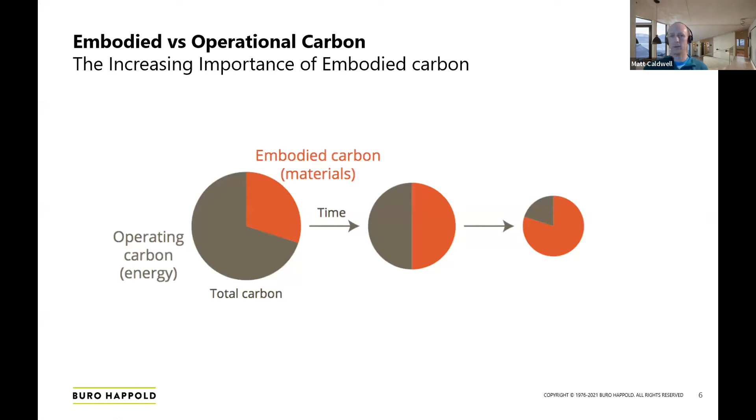And obviously right now is the time when we need to be reducing our emissions. Over the life of the building, the operational carbon may go down - hopefully it will - as the grid decarbonizes, and potentially pieces of plant or equipment within the building might be more efficient. So over time, the proportion of the carbon footprint that's embodied carbon will get larger and larger. So it just emphasizes the importance of us considering that now - it's important today, and it will continue to be even more important over the life of the building.

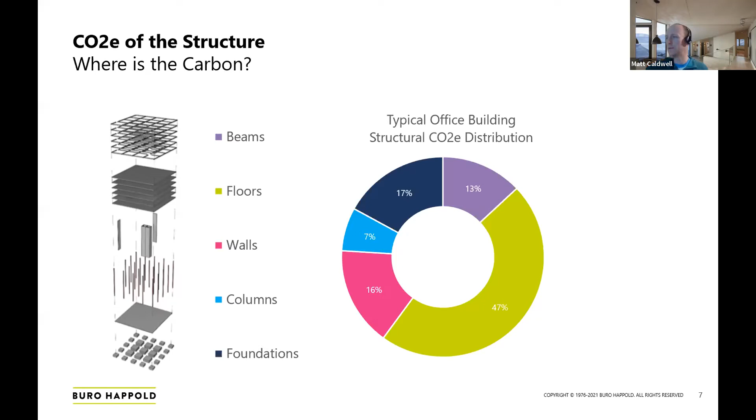If you're looking at columns, swapping materials or spending a lot of work on them often is not as beneficial as focusing your attention on the floors.

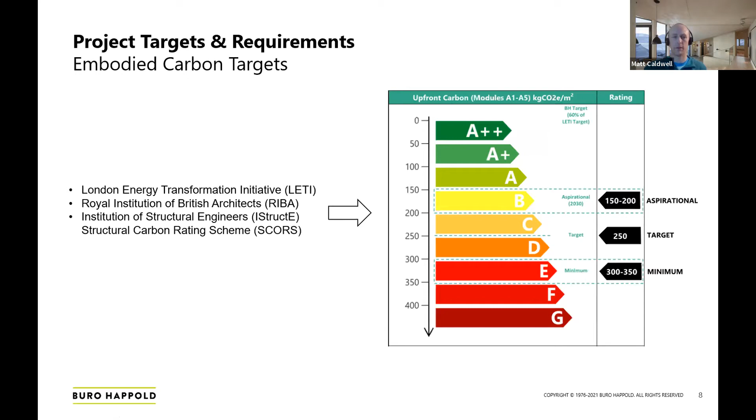At the start of the project, you could be deciding materials overall. You could be looking at whether you're building 10 stories or 5 stories, whether it's a tall building or a wide building, whether it's framed or load-bearing walls, and also controlling the grid. As the project develops and the design develops, you'll have less and less ability to influence it. So making the big decisions in an informed way early on is extremely important.

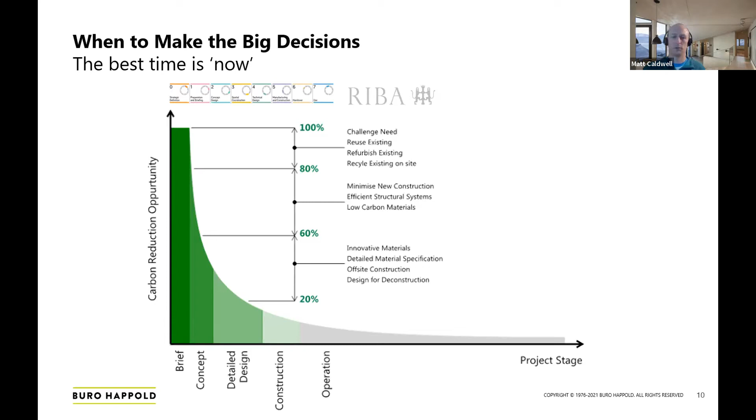Obviously, it needs to be balanced with what the spaces need to do within the building and the architecture of the building. Once you get down to really short spans, you're seeing less benefit in embodied carbon terms, but you also need the building to function over its lifetime.

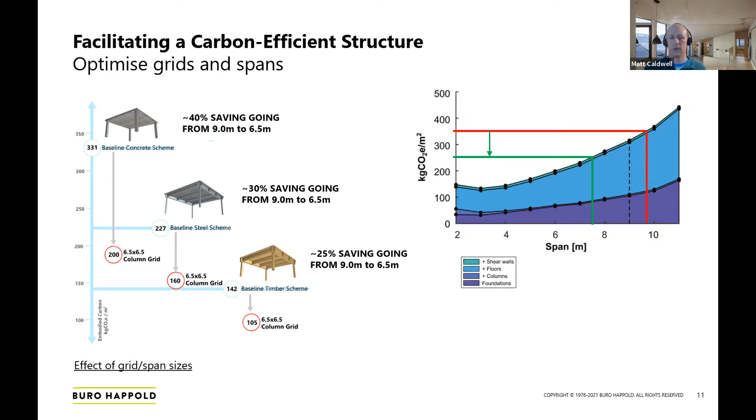And dare I say it, a wholly timber structure is not always the best answer. You need to use timber in an appropriate way, rather than shoehorning it into a design which doesn't suit it. There may be elements within a structure where you have lower embodied carbon and a more efficient structure by introducing another material. The other way of looking at it is if timber is coming out as a very inefficient way of forming a particular element, then maybe you need to go back and look at the way the structure is framed, where the loads are going, and revisit it that way around.

But it's not always most efficient to have timber everywhere. Don't force it to do things that it doesn't do efficiently.

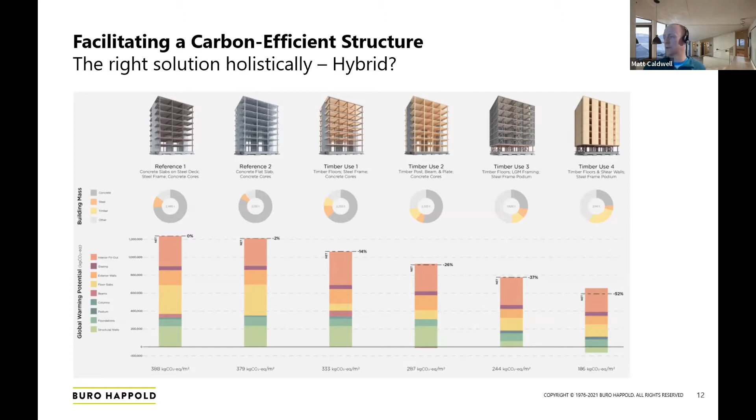Particularly with timber, one of the huge advantages is the carbon it stores while it's been taken out of the forest but not yet burnt or disposed of. The benefits really only come about if it's a long-lived product or series of products. What you don't want is something used for 20 years and then burnt, or even worse, taken to landfill.

So considering the way your elements are designed individually, and particularly how they're joined together within your building, will decide whether you can take the whole building down and rebuild it elsewhere, whether you can adapt your building in situ, or whether you can take the elements apart and put them into a new structure. Considering that is very important, particularly with timber.

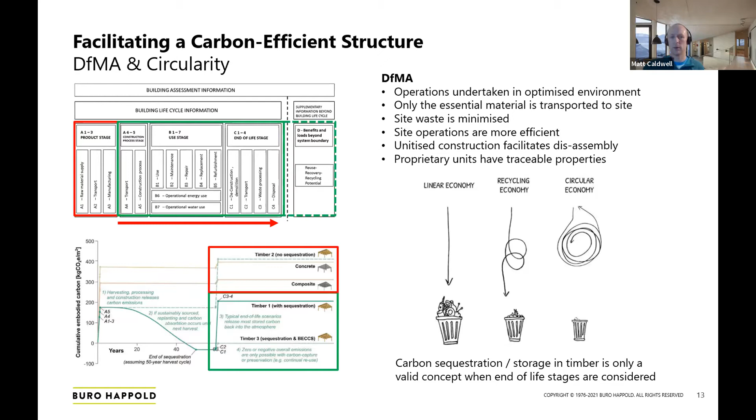This is a big debate, had on a regular basis. The word sequestration is used a lot - I prefer to use the word storage. It's not worth trying to understand this whole diagram below here; it's probably just worth saying that it is complicated. There's a lot of carbon going in and out of a project.

You will see projects in the architectural press which claim to be either carbon neutral or even carbon negative. When you read that, you just need to look into it carefully and understand precisely what the claim is.

Depending on how you run your numbers, if you use all the sequestration figures for timber, your analysis could indicate that putting more timber in is better than less, and the more you put in, the better it performs in terms of being a negative value - which obviously doesn't make sense. You don't want to make a beam twice as big as it needs to be.

Those numbers are not really telling the story. So I like to quote the stored carbon within a building rather than calling it sequestered.

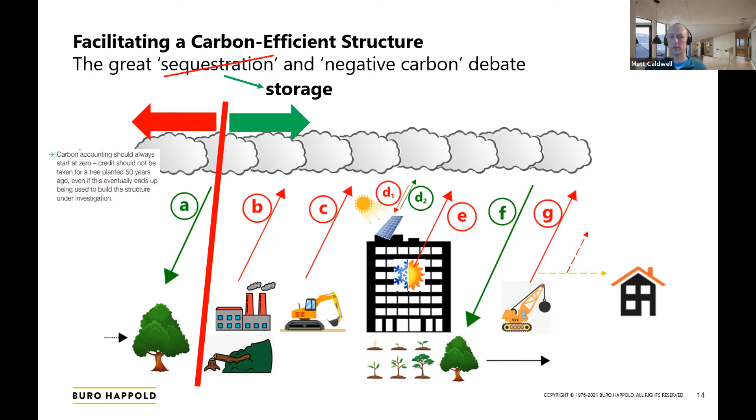We talked a lot about the superstructure, which is normally where you focus a lot of attention, probably because it's the bit you see and the bit most readily changed between materials. But it's worth keeping in mind the substructure.

The default material for substructures is obviously concrete, and there are good reasons for that - its durability - but it's worth considering other options.

Particularly in the Netherlands, they use a lot of driven timber piles, and there are certain considerations you need around durability primarily. It will depend on your soils whether that's relevant, and also where the water table is - otherwise you might end up having to have a reinforced concrete cap on the timber to go down to the water table anyway, and it might not be practical.

Helical screw piles are a good option, particularly for lighter buildings - so a scheme of 1 to 1.5 stories. This could be a very possible solution, though it does depend on the soil to some extent.

The advantage of these is that far less material is used than in a concrete pile, and it's removable, facilitating circularity again - in principle, at the end of the building's life you can take them out and reuse them. Often you can also get the option where the central pipe forming the pile can be reusing excess stock from the oil industry, which is quite a nice poetic side of it.

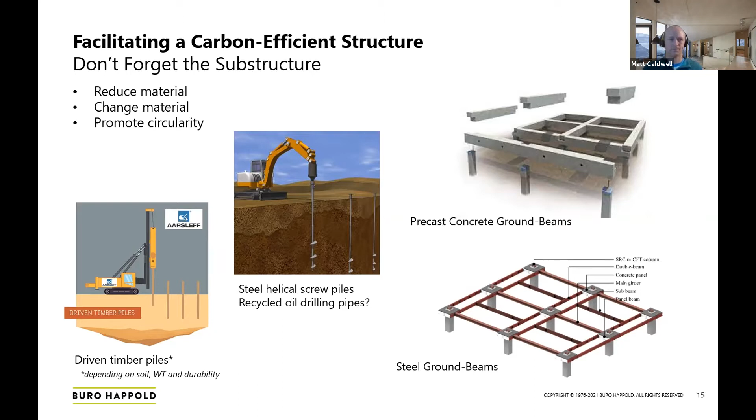And do the math - have a look at what you're using within the building, especially if you're optioneering, even if it's quite rough. You don't need it down to the very last kilogram. Even just making rough estimates early on, it's much better to have a rough analysis to help inform your decisions rather than waiting till the end to get a perfect one.

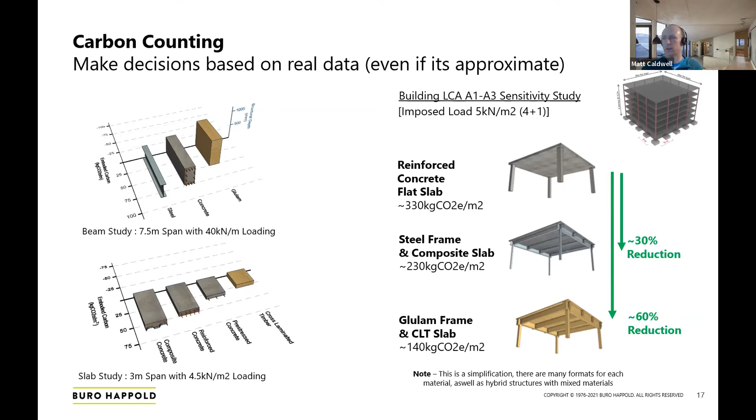And sometimes your gut instinct isn't quite right. This is just an example of a concrete structure, which I ran quickly, so maybe don't quote it directly, but you would possibly instinctively think the hollow core plank is going to be low embodied carbon because it's pre-stressed and it's got fresh air inside it, so it's not just a solid lump of concrete.

But actually, when you dig into it, you often find that precast concrete manufacturers don't want to use any cement replacement, so they want to cast it to cure as quickly as possible, get it out the door, off their production line and sold, which means that you're probably not getting any cement replacement in it. So the material itself is actually quite carbon dense.

Whereas you might think an in situ poured slab would be higher embodied carbon, and it certainly would be if you were using no cement replacement. But if you can, the advantage of in situ is that you can then introduce cement replacement. And if you went to very high levels of GGBS, like 70%, that could come out, even though there's more material, lower embodied carbon than the precast plank.

It's obviously not as good for DFMA and modern methods of construction, and it's not as good potentially for circularity. But I suppose the point is just to look into these things and consider the detail, because sometimes your gut reaction isn't the whole story.

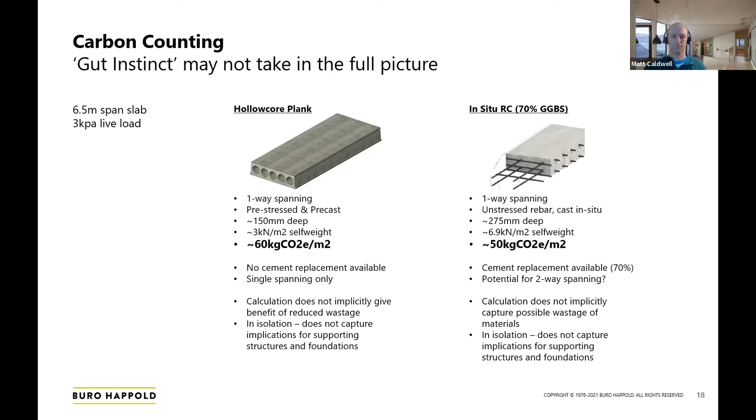And just to talk about timber specifically, you probably have presentations already on this, but the advantage of engineered timber that we have available to us now, which we didn't have 50 years ago - traditionally, if you needed to make a big beam or a big column, a large section of timber, you had to find a tree that was big enough to have that bit of timber effectively inside it. It would have been growing a long time, and you wouldn't get all that much material out of that tree.

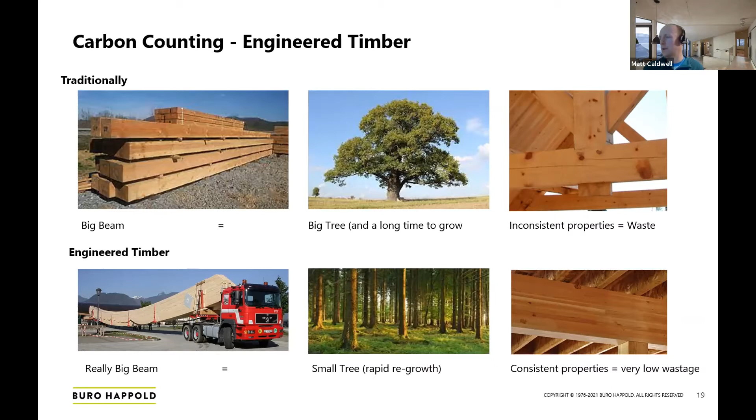You also then have got all the knots and faults which are in the timber, which means that you've got to design according to that and cater for the fact that there could be a big fault right where you don't want it. Whereas nowadays we can make really big beams, as you can see there, but they're actually made out of lots of small pieces of tree, which means that you can use more of the tree. You can use trees which are not as old, and by laminating it all together, we've also got a very consistent material, so you're not having to cater for the fact that there might be a knot all the way through the worst area of it.

Then digging into timber a little bit further, or engineered timber, there's obviously lots of different forms of engineered timber, which are better or worse for certain jobs, and so you can get an efficiency in your embodied carbon and your cost and amount of material in general, just by selecting the right product for the right location.

So you might look, if you were really trying to work some beams really hard, at LVL instead of glulam. You might find that cross-laminated timber was becoming a bit inefficient for a slab, so you might go to I-Joists with plywood on top of it, for example. So it's worth looking, even once you've decided perhaps that you want a timber structure, at the different options of timber products within that.

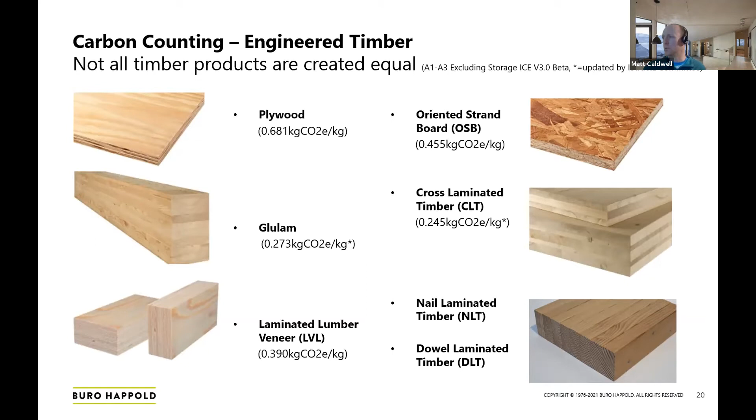So just applying this to a project, the business-as-usual, kind of dumb way of looking at it might be just to chuck in some reinforced concrete piles, because you kind of know that will do the job in most situations, and then cap that off with a big lump of concrete as a pile cap. And then you might put a frame in so that the structure is kind of separate to everything else in the building. By doing that, you'll end up with point loads, which might need piled foundations.

And then again, you might just pour your slabs in situ concrete, because that's kind of a bit of a default. You might just have your spaces on different stories of the building not stacked at all, so you're having to transfer out the weight of partitions above.

Your partitions, again, you might just go for concrete block, because that's kind of cheap and basic. Brick facades are quite often used just to get through planning in lots of cases, and a roof void up there, which isn't doing anything for you.

But looking at it in a smarter way, if it's a small building, you might look at distributing your loads to the foundation so shallow strips or a raft work for you, reducing the amount of concrete. If you use load-bearing walls, you could effectively form the architectural skin of the building and use that as structure at the same time, rather than doubling up with a frame. That will also help distribute your loads. Stacking spaces so that you can have load-bearing walls.

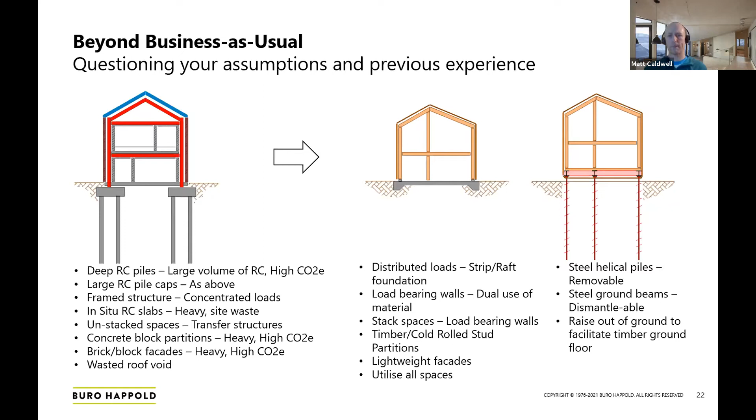Excellent, thanks very much. That was really insightful. I think what you've captured there is really how modern structural engineering has to think - it's about how we structurally engineer for the future, and think about the materials we're using and the optimization of those materials relative to the end use.

What was interesting as well is the point about wanting timber-based solutions, but we have to think also about the timber products we're utilizing within that end system, because they have different associated carbon credentials, etc. So there's that piece, and then also from the foundations - not just the weight of the structure, but how you set the structure out and the impact that has on the foundations, and the type of foundation you can therefore specify, and there's a range of those.

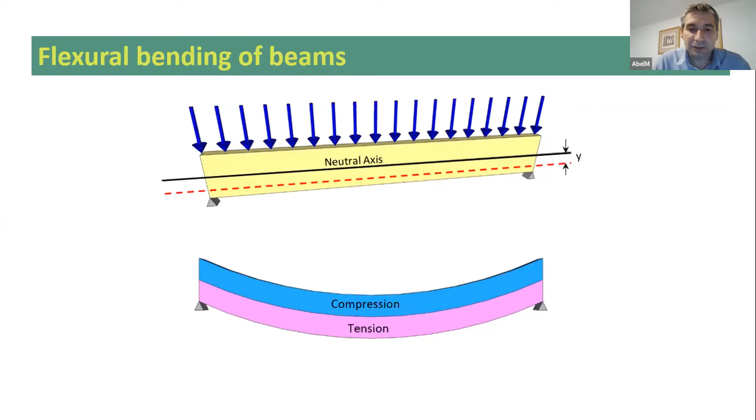The magnitude of both bending moment and shear forces will vary along the beam. However, this variation is due to the nature of the forces, such as a point load or a uniformly distributed load, or the fact that it is simply supported or a multi-span. For example, if you have a uniformly distributed load, you can find that your maximum shear forces will be near the support and your maximum bending moments will be at the mid-span. However, the cross-section of the beam at this stage will not influence the magnitude of these forces.

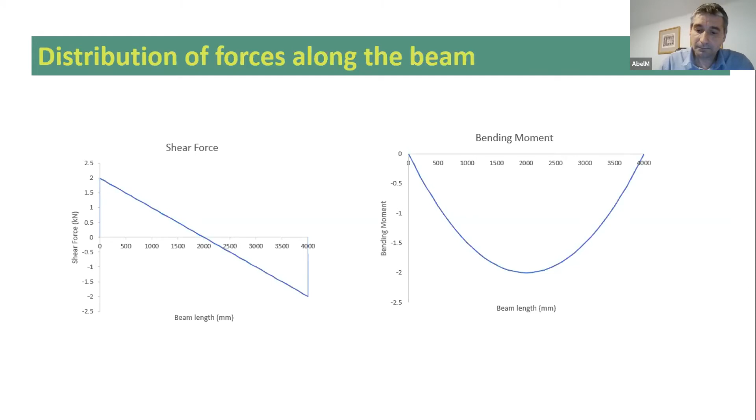Once we consider a section within a beam, these internal forces will become what we call stresses. Basically, a load over an area is a stress. And then we can talk about bending and shear stresses. The magnitude of this stress is important because we need to ensure that they are not over a certain value, or they are not over your strength values. Otherwise, you are risking failure in the beam. The distribution of such stresses within the cross-section can be determined using a formula that has been deeply ingrained in engineers' education.

These equations are interesting in that they tell us the distribution of stresses within a section is dependent on shape, which has an influence over the magnitude. For example, in bending stresses, you can see the I, which is the inertia, or the resistance of the beam to rotate. You can see the Y, which is the distance between the neutral axis and the fiber we're talking about.

For the shear stresses, you can see the Q, which is the first moment of inertia, or a measure of how the area is distributed around the neutral axis. And T will be your thickness, and again your inertia, and M and V are your moment and your shear.

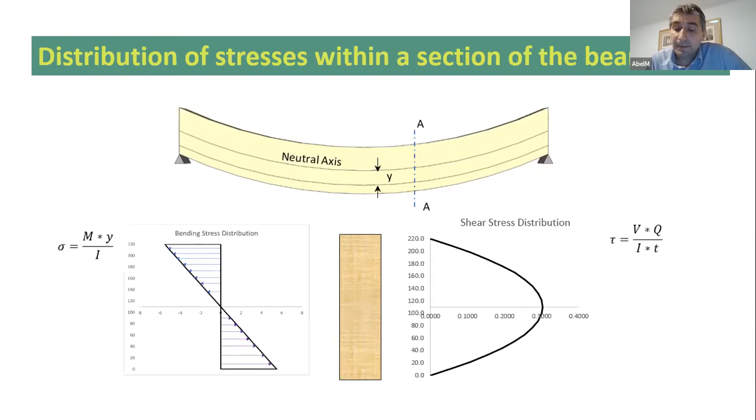So, as I said before, most I-Joist manufacturers will put a softwood flange at these locations. The main reason is because timber has very good bending strength. Some manufacturers have replaced that with laminated veneer lumber, LVL.

At the beginning, the web used to be plywood, which has been changed to OSB because OSB has a higher shear strength than plywood. Different manufacturers have different products; they usually have different depths and different widths for the flange, and they will play with these parameters to gain advantage on bending strength, shear strength, and stiffness as well.

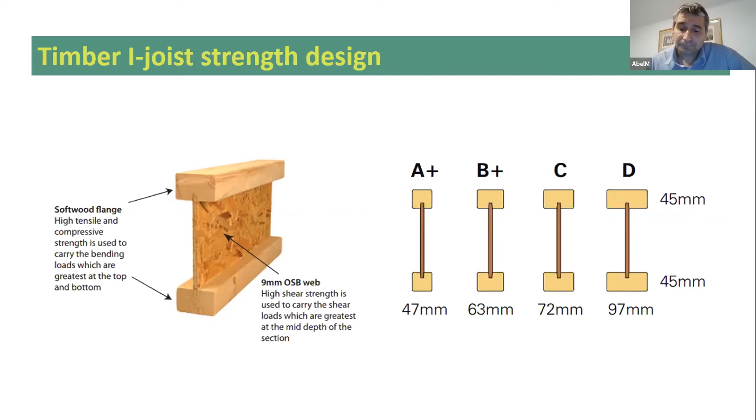One of the areas we talked about in timber design is that strength is an important property, but most design in the UK, especially for UK floors, is stiffness limited. If you look at the design codes, they normally reach deflection or vibrational limits well before the strength limit. So it's important to see how an I-Joist section can help achieve higher stiffness so you can achieve the spans needed in actual design.

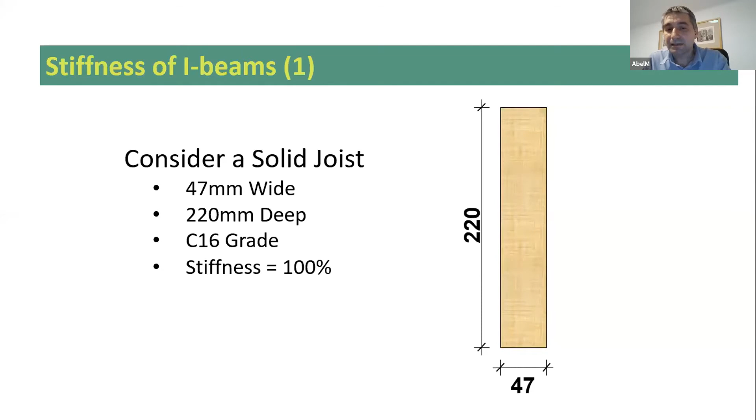Looking, for example, at a normal 220 by 47 old-style C16 that used to be used in timber floors, we will call that stiffness 100%. If we cut a portion from the middle, we have a 21% reduction in timber, but we only lose 2% of the stiffness.

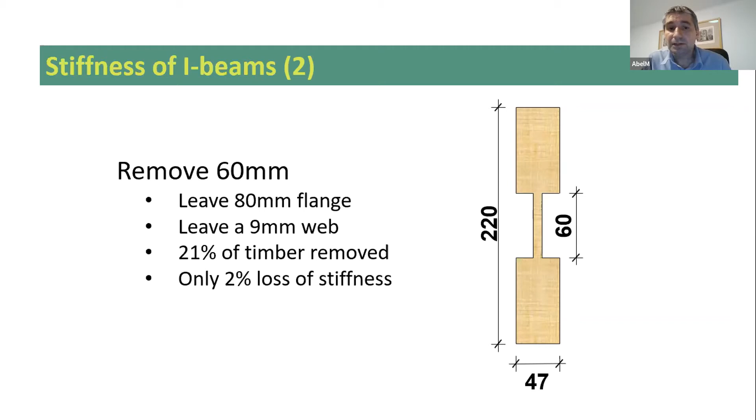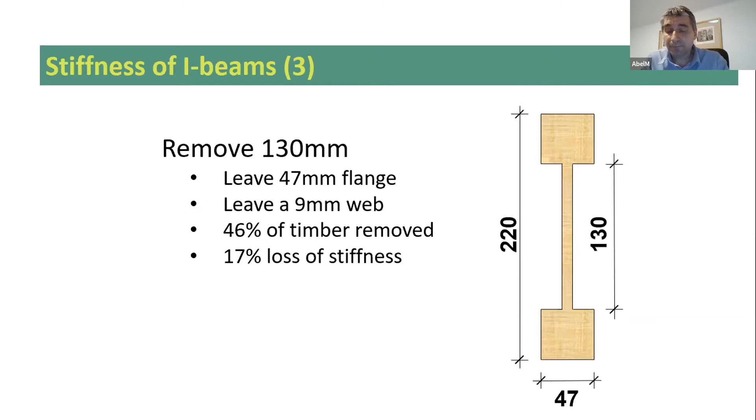Cut that further, 130 millimeters, and we get 46% removed and only a 17% loss of stiffness. So what happens if instead of C16 we use C24 for the flanges, and instead of timber for the web we use OSB? You find that you get an increase of 46% in stiffness over a standard C16 joist. And that's basically the philosophy of an I-Joist.

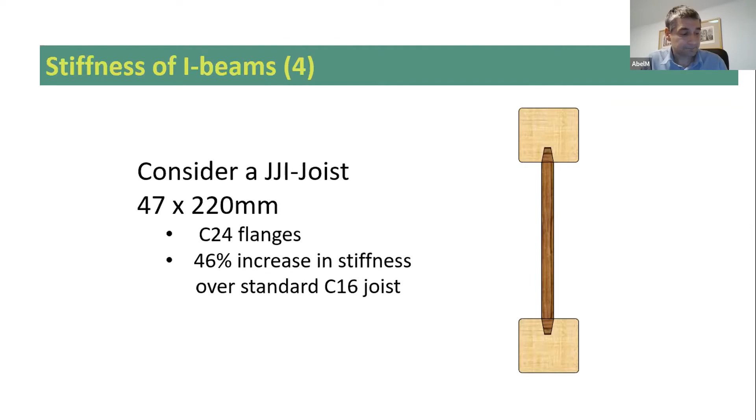So there are different advantages when we're talking about I-Joist. The first one is optimized amount of material. As you can see, you can save a lot of material compared to a rectangular section. And that is important in an economy when timber is scarce. We are celebrating, and I'm very glad to see a lot of different projects with timber, but don't forget that it takes about 20 to 25 years to grow a tree. So optimizing the resource as much as you can is paramount.

Another advantage that timber I-Joist has is that they're lighter. They weigh much less than other options. So it creates a lighter structure, and hopefully it will save you some money on foundations.

They are quick to install because people can handle them. Extremely stable because you've got small sections, and also timber panels are very, very stable to moisture. They don't expand and they don't grow as much as timber does. And also you've got availability of deeper sections, longer spans, higher stiffness to weight ratio.

And you can drill services. You only have to go through a 9mm OSB to drill a hole in order to pass an electrical cable or a pipe. And that's a very, very usual scenario when you're talking about traditional UK housing.

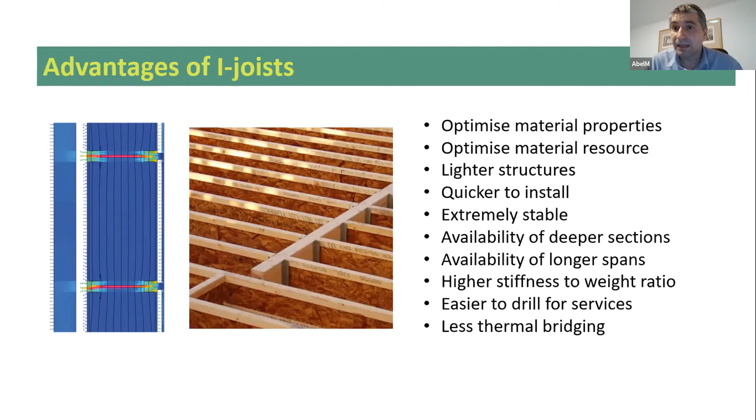Just to finish, I would like to show some of the projects we have been involved in. As I said, these projects are more diversified now, from typical floors to mezzanine floors in supermarkets, or roofs, or ground floors, or even walls, as you can see there.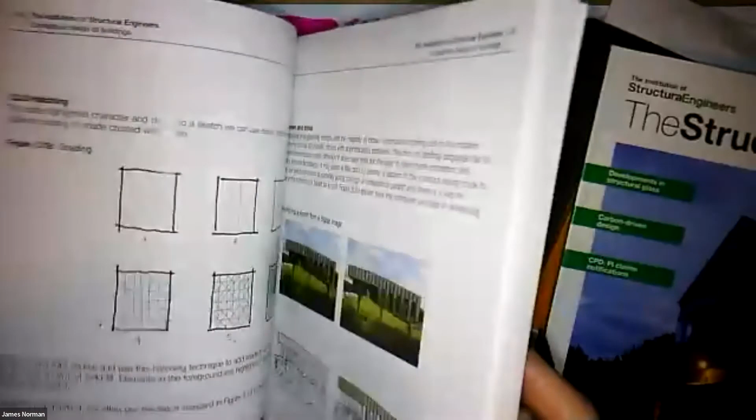Tabitha has the link - I actually recently wrote a book on the conceptual design of buildings. It's aimed at structural engineers. If you're a student doing a final year design project or an earlier year's design project, this book is, I think, hopefully gold. If you're an architect, there's still loads of stuff in here, and it's based not just on my experience but a whole load of us wrote it together, with a whole load of experience put in.

Anyway, so questions I think we should be asking - I've got a whole load of what if questions. What if cement is banned by 2030?

What if energy intensive materials are taxed so they cost 10 times more than they do now? What if your project was the last project to use this particular material? What if all metals had to be recycled? What if our timber usage is limited to guarantee the world's forests are growing?

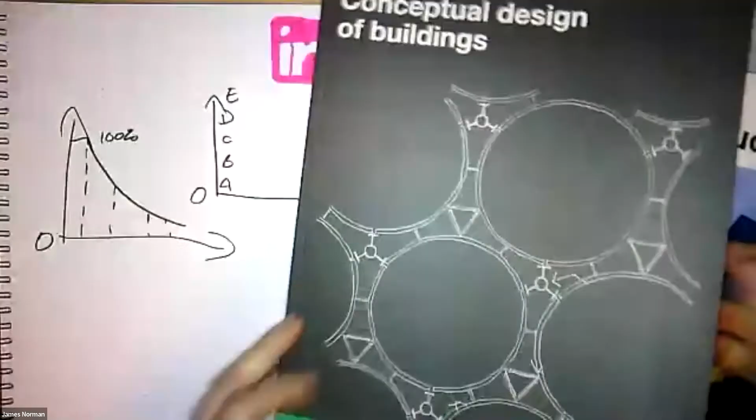Which I think is a really important question, and relates a bit to what Matt was saying earlier about it being all very well to talk about carbon sequestration, but you can't rely on what's going to happen in the future in what we're doing now. So I actually took a what if question, and I think those questions are really powerful. I took one recently and drafted a little article that the I-Struct asked me to write for them.

This is available for, well, I was going to say for free. It's free if you're a member of the I-Struct, which I'm not, even though I think they're fantastic, but I don't want to do the big scary exam. I'm sure some people on the call are. But if you're a student, I think you should be able to become a student member - and definitely if you're an engineer, regardless of what you're studying. They've got loads of fantastic resources, and if you're a student member, all the articles they've done around net zero you can get for free. So I'd really recommend you dig out not just this article, but look at all the different stuff.

I noticed in the chat earlier someone was asking about sustainable design and resources. They've got an absolutely incredible wealth of great resources on the I-Struct website at the moment.

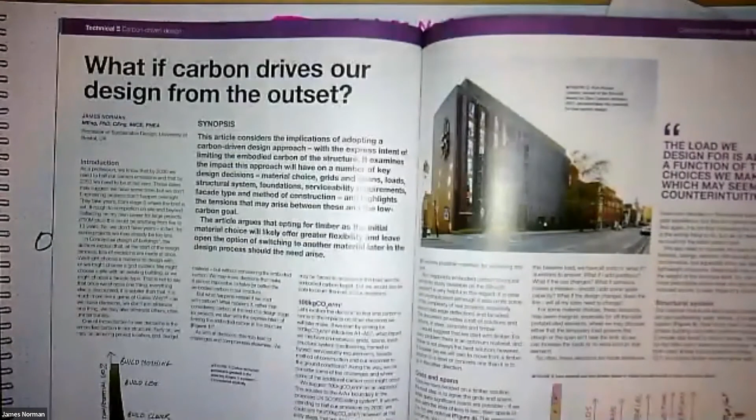So I started by asking, what if carbon drives our design from the outset? And I was trying to get to - this is a diagram that Matt drew, I stole the one from BuroHappold, I've got lots of friends there, but I redrew it by hand to make it look a bit more squiggly. And I said, what happens if we start and aim for down here?

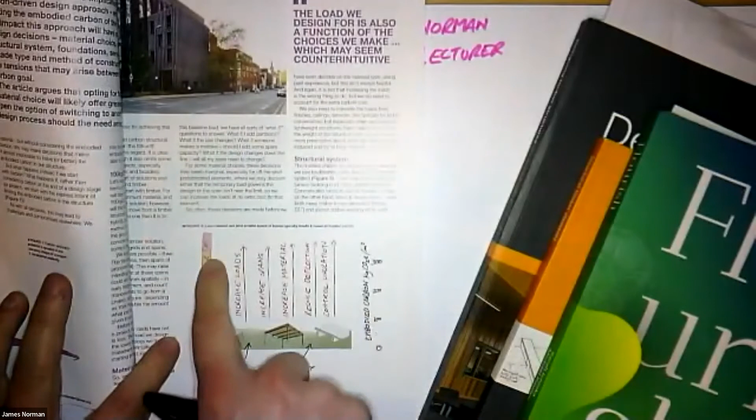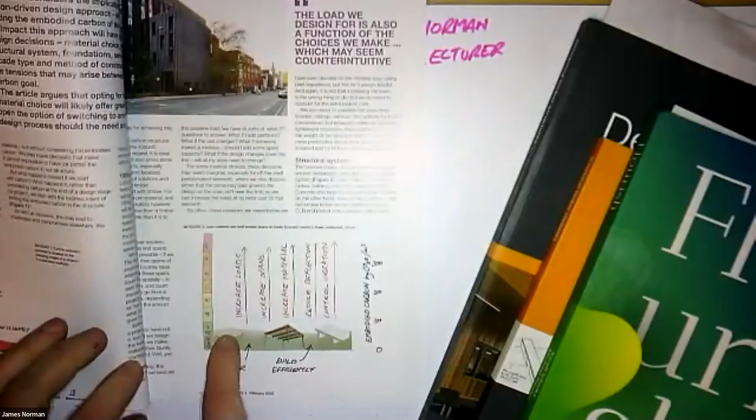Rather than saying, okay, I'm going to design a building, it'll probably be at least 300, 350, what happens if we say, I'm absolutely not happy with that position. I'm going to try and get as close to zero as I can, and make as many decisions as possible to help me stay down here, rather than assuming a whole load of other things.

And we could start to ask some what if questions. We could ask about the load - is the load suitable? Could I reduce it? Are the spans suitable? How could I make the spans short enough that I'm definitely down here? Are the deflection requirements suitable? One of the big things that can drive design is the deflection requirements for facades.

What if we said, actually, I'm not going to change my structural design to fit a facade - I think the facade should match my structural design. What an interesting question. Sometimes we have no control, right?

So if you're designing a hospital and you've got to design for vibration, then I think there's a question - we can assess it and go, okay, well, I think this is really important. It's important we design for vibration for a hospital or a laboratory or something like that. So actually maybe I can't use the lowest carbon solution, maybe I have to increase it.

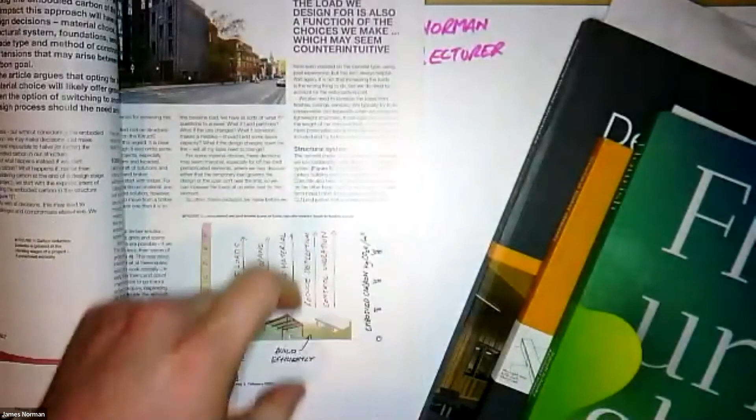But we start to realize that these decisions we make - more load, bigger, lower, more, tighter deflection criteria, all of that stuff - actually all of those things drive up the carbon in our project. And so if we start making those decisions and realizing we're driving up the carbon, that is really, really interesting.

So I've got another what if question for you, and Robert will be able to correct me. But what if the timber for this project were all locally sourced?

What if we started by, rather than saying, this is the load I need, these are the spans I need, and this is the kind of dimensions - what happens if we started the other way around? This is the material we've got, this is what we've got available.

And we could use Matt's idea about taking big bits of timber, chopping them up and making smaller things and sticking them together - that would be excellent. And we could look at the timber I-Joist idea and say, oh fantastic, a lot of timber design is governed by stiffness, by deflection. But what if we used our material to be more efficient? But what if that timber was locally sourced?

I've sent Tabitha a few links, and now is a good time to mention them. One is ModCell. I used to work for a company called Integral Engineering Design, and two of the directors for Integral were also directors of ModCell. For a while, I'm not sure if they're still operating, they did this interesting idea where rather than manufacture their prefabricated straw bale modular construction panels in a big factory, they used what's called a flying factory.

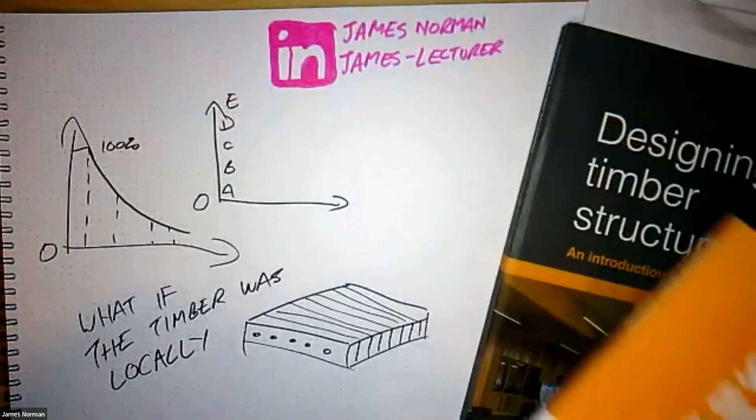You might be saying, well, I don't know what grade the timber would be. If you don't understand what grades are, don't panic - they're something engineers use to conglomerate all these different things about a material and say, what I want to know is what grade is it. I don't really worry about what species it is - I could design a timber beam made out of spruce or pine. I'm worried about how strong is it. So as a structural engineer, I'll grade it, and that grade will tell me how strong it is.

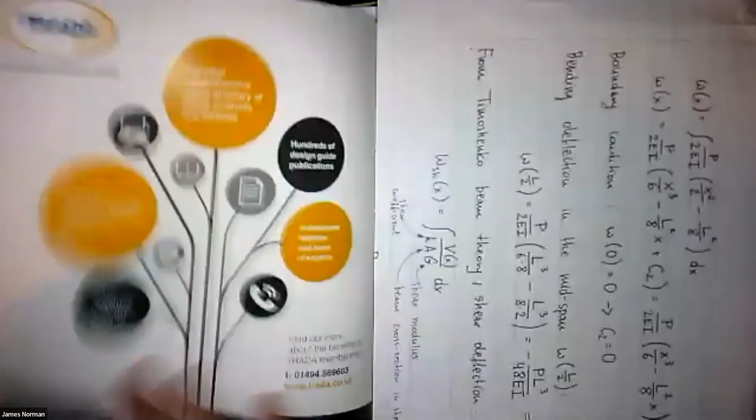The grading process is complicated and covers a whole load of things, not just the species - it's to do with things like knots and damage and all sorts of other factors. If you'd like to know about that, I actually wrote this book, Designing Timber Structures, to explain all about it. Oh, I was looking for that - that's about shear deflections, useful for my students. There's loads of stuff in here about properties of timbers and grading.

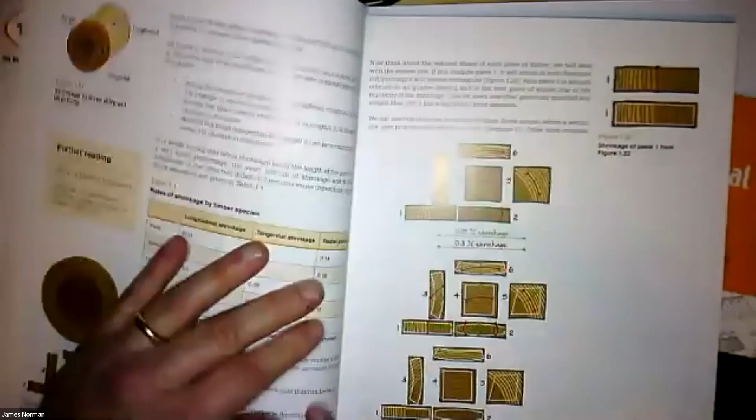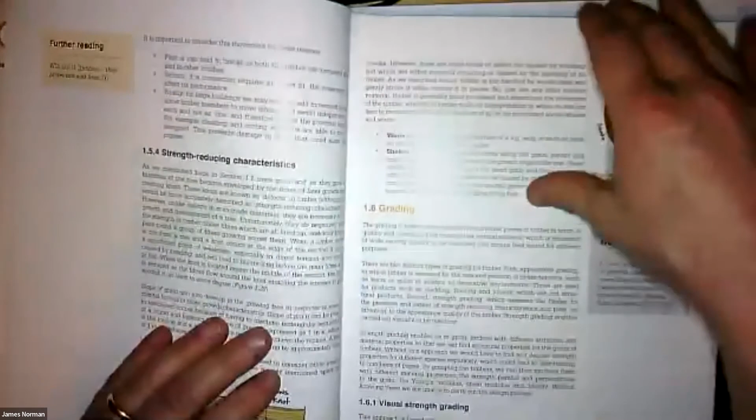But I'd encourage you to read this chapter and think, rather than thinking about grade, maybe flip the question around and ask what timber is available, what species it is, and how long it's going to be growing for. Is it quick growing or slow growing, and what impact will that have on the strength? Try thinking about it that way instead, and hopefully you'll end up being able to say what your timber is - and what happens if your timber isn't any of these grades?

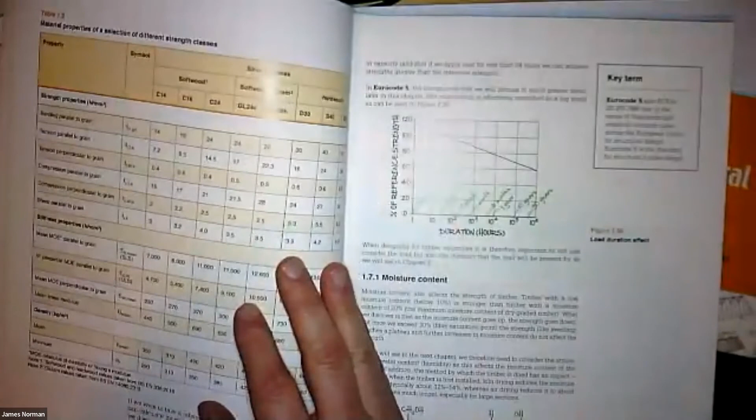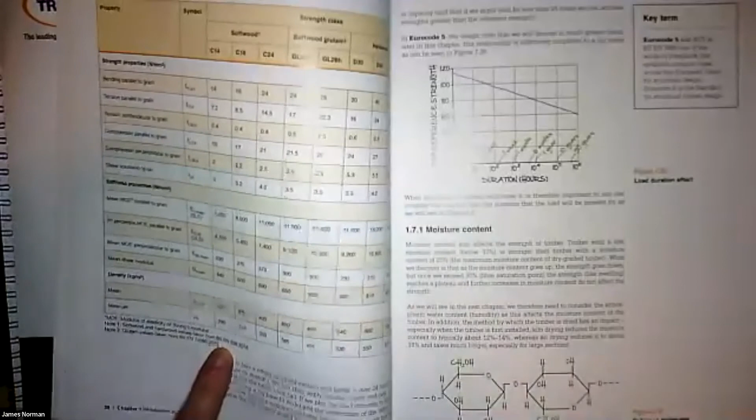What happens if it falls off the chart? Well, number one, there are much better charts in British standards, and hopefully you can find those if you're at university or work for a company. Hopefully you have access to BSI online, so you can look them up and find out what grade you might use.

And then you can start to design with that grade. So I was encouraged to talk about solid timber, and where might I design? So some what-if questions: what if we use local timber? What if I was to start with that?

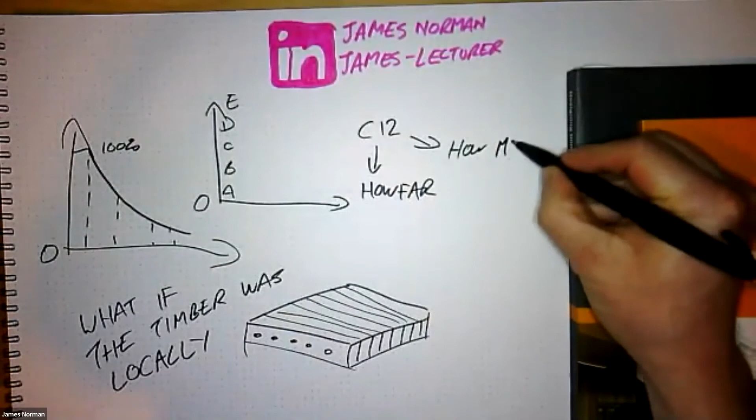What if I started to say, I know what timber I've got, and let's say, just for the sake of argument, it's C12. What questions could I ask? How far could it span? And at the same time, how much load? Because the two things are not separate, they tie together. We could start to ask these kind of questions.

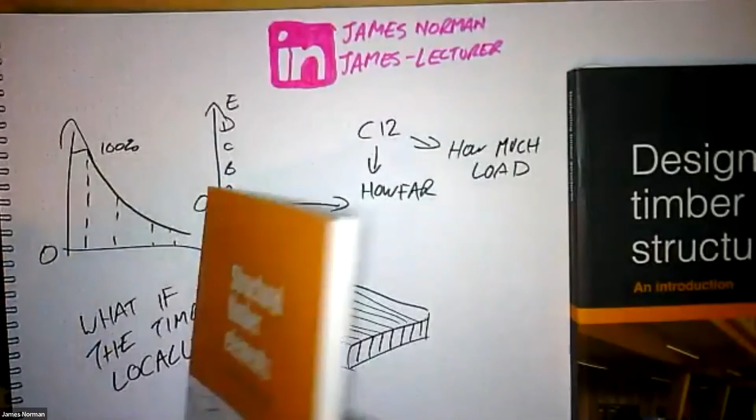And actually, these are exactly the questions I started to ask myself when I wrote this book, Structural Timber Elements, which my friend Simon Smith helped with—he worked with me at Ramboll. And when I left Ramboll, well, when I left to become a full-time academic, he emailed me and said he thought it was really important that there be this book.

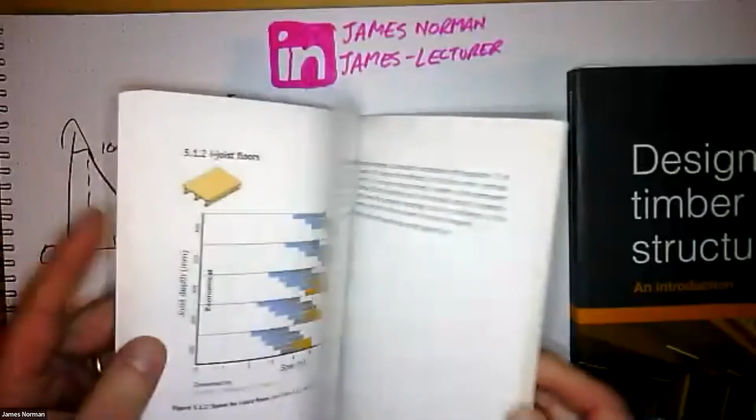It's a pre-scheme design guide. It basically rivals the Economic Concrete Frame Elements, which is another very good book if you want to do pre-scheme design of concrete frames. So he said, what if, now you've got all this spare time because you're an academic and clearly just sit around all day twiddling your thumbs...

What if you were to write this book? So I said, yeah, why not, I'll give it a crack. And so I started to look at what span I could achieve with different sizes of timber. So rather than saying I've got a load and it's got to go this far, what size timber do I need, I said, I've got a timber and it's got this load—how far can it go?

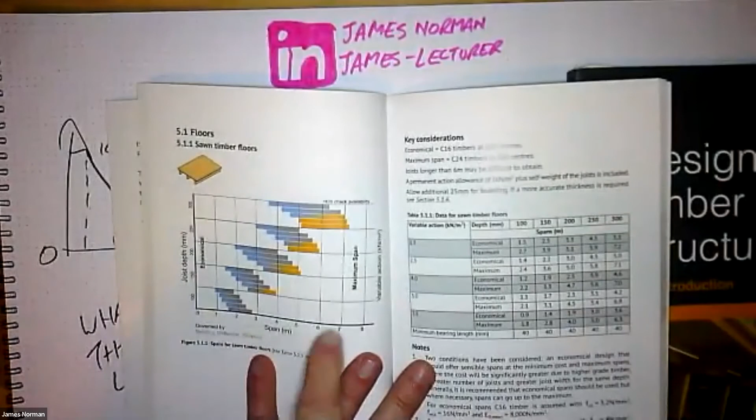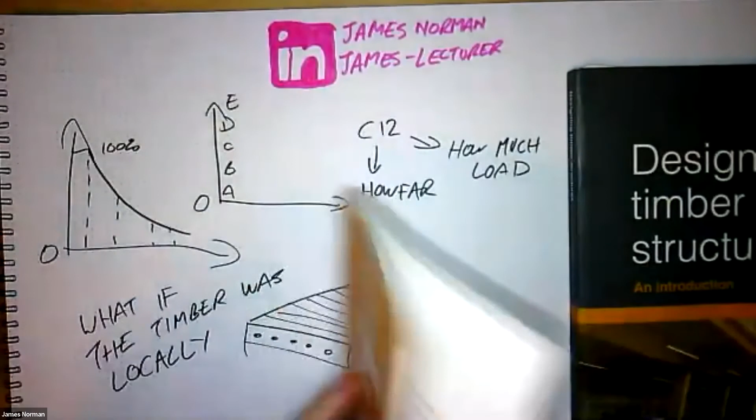And that process is actually fairly straightforward, not difficult. I created some big spreadsheets because I looked at a lot of different options, not just the ones presented in here—I included a lot more, and left some out. But I asked those questions, and you could do the same thing.

So you could find out what is available locally. How could I make it? What could I make with it? Could I make an I-Joist? Could I make the equivalent of glulam or LVL? What could I do? And then ask, for that material, how far could it go, how much load could it take, and then could I make my design work to those constraints?

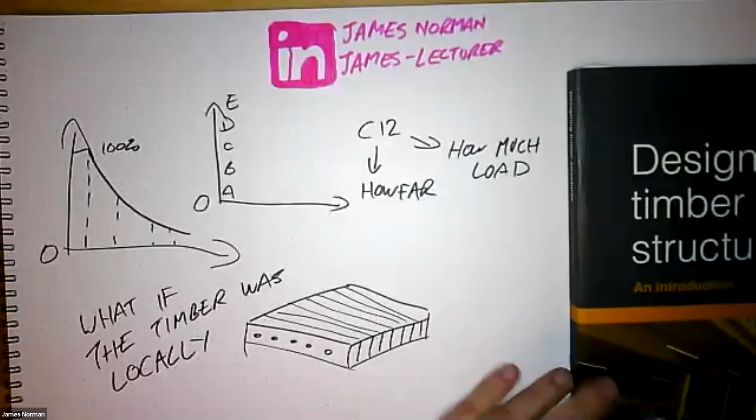So kind of taking the whole thing in the opposite direction. And to do that, you might think, well, actually, I don't really know how to design timber, I've never really done that before. So don't panic, because the whole idea is that this book, Designing Timber Structures, will take you through literally every bit of the process.

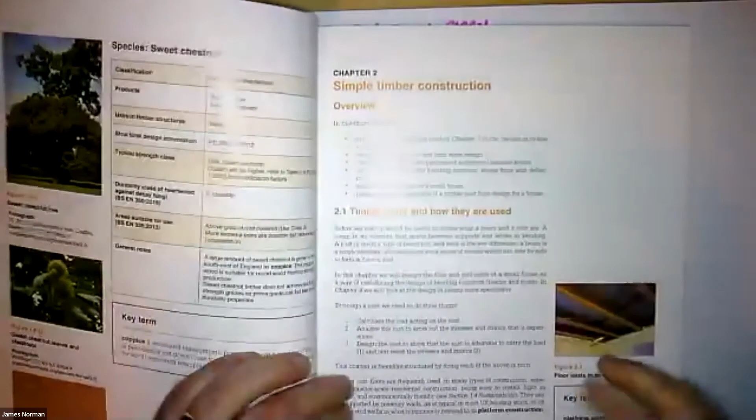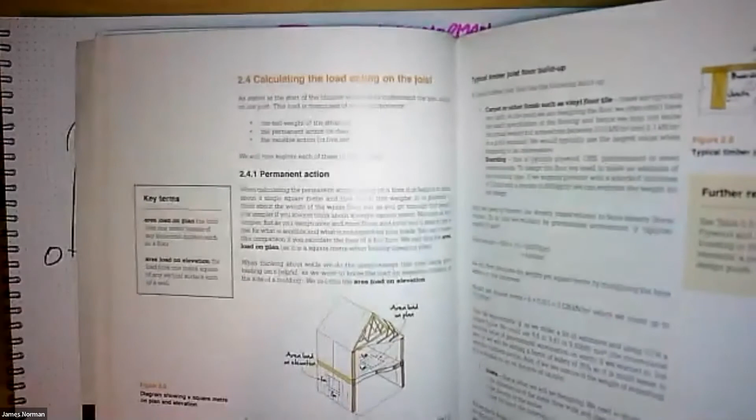It will tell you how to design a joist, it will explain what it is, it will talk about factors of safety and probability and uncertainty—which I think is another great what-if question for another day. It will tell you how to calculate your actions: your permanent action, which is the weight of the floor, the weight of the ceiling, and all of that—really important things to know—and the variable action, the weight of people and so on.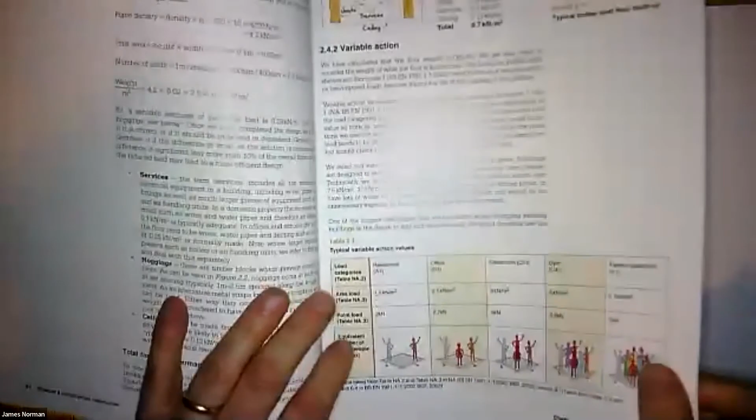If you can't find the situation you're looking for, look in chapter 3—there are more loading diagrams in there. And then how to analyze your joist: these are the shear force and bending moments, as we saw in the last presentation. How to design for this stuff, how to think about long-term creep, displacement, and all of that sort of thing.

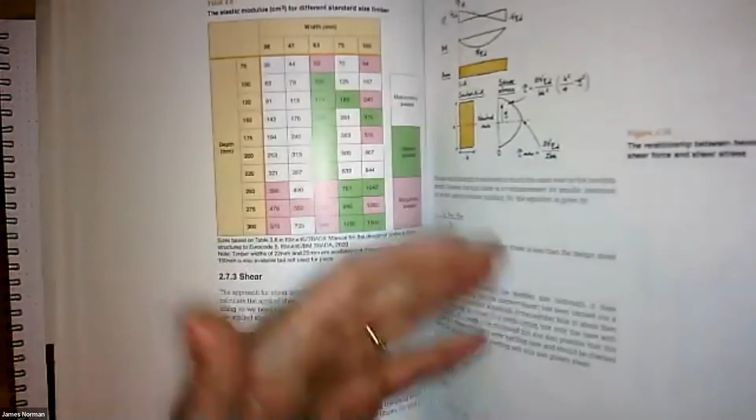And at the end of the whole process, you end up saying, okay, this is how I design a beam, and we can then crack on and design it. Now, if it just so happens that beam isn't in any of the design tables, well, that's okay—there are ways of finding out that information.

So I think I'm done. I hope that's okay, and I'm really looking forward to your questions at the end of this.

Brilliant, thanks very much. I really liked the provocation, James, of what if you use local timber? What if we turned it on its head rather than starting off with a building and then trying to figure out what timber to use. Let's start with the timber and figure out how to make sense of that relative to the actual building. That's food for thought for the challenge. We'll save other questions for conversation at the end, thank you very much.

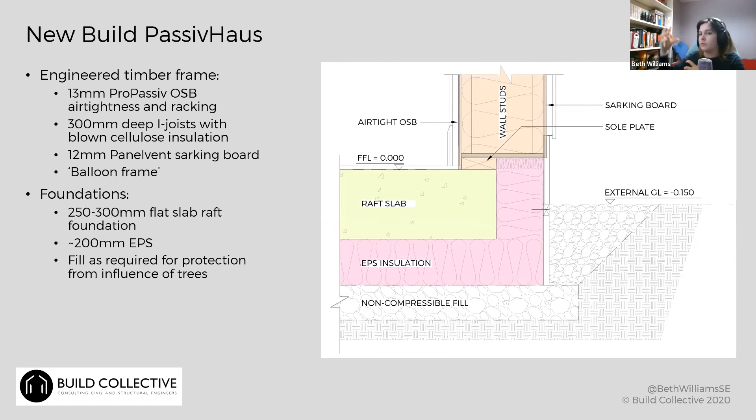Then to do the air tightness past that, you can either run the OSB board continuous past the wall bearer, but sometimes that is tricky to build. So another option is to run a strip of air tightness membrane behind that wall bearer to then tape onto your two wall boards either side.

The way to break that junction to make it sort of platform build is to then bring that wall stud up, and we generally bring it about 100 mil above the level of the floor zone, because that gives an easy junction above the floor to do the air tightness taping and make sure we're getting a good air tightness junction across that floor junction.

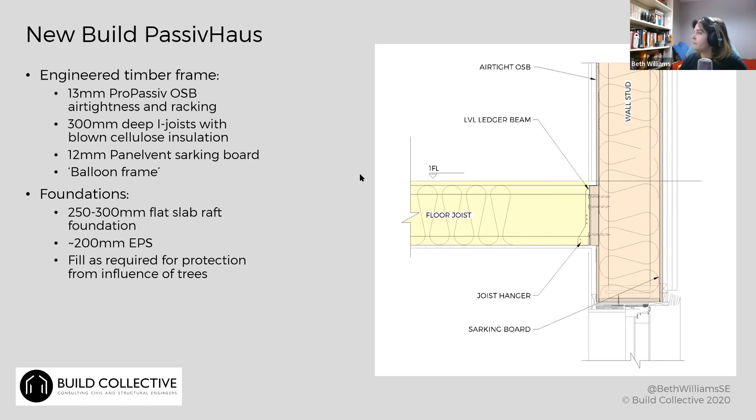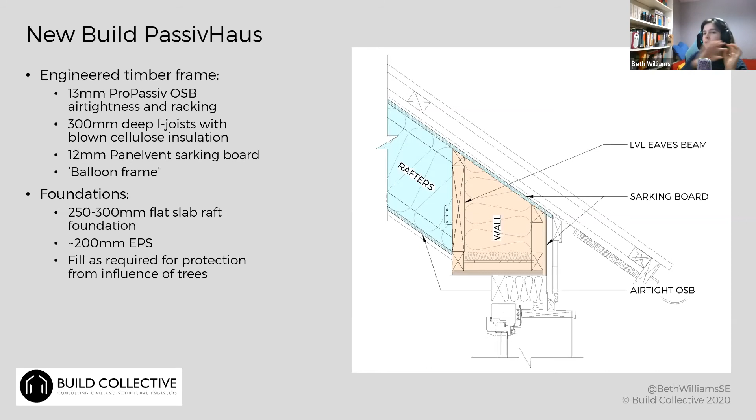When we're dealing with blown insulation, we're always thinking about getting big long boxes that we can blow our insulation into. Usually your wall studs would come up and break it, and then you'd end up with lots of little pockets of insulation along the eaves, which is a recipe for things going wrong. So what we've done in this case is made our box along the length of the eaves of the building, so that we've got a nice run of insulation all the way along the eaves.

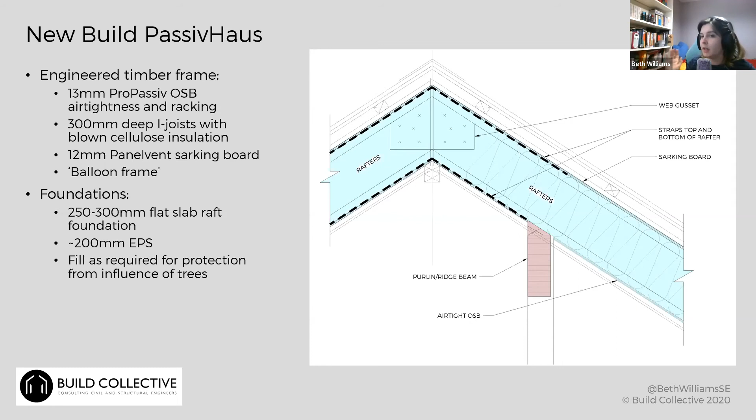Again, similar considerations when you're looking at the air tightness requirements for passive house: you generally need a strip of air tightness membrane across that ridge beam before you put the rafters on, so that you've got something to make your air tightness line continuous over the ridge.

This project has 400 deep I-joists as the walls and the roof, and it's got a sort of partial suspended floor, which you'll see in a second, and those are at 300 deep. So we did swap the size of I-joists around in this project.

The architect and the energy advisor wanted to do this project without a ridge beam. They were thinking it would save costs without that ridge beam. I'm not actually sure that it did, because it then required a lot more temporary propping before they could get the structure up and self-supporting.

But there we go, we made it work, which worked really well in this case, using I-joists as the wall studs, because then we've got some bending capacity in the wall studs that we wouldn't necessarily usually have, particularly not compared to a masonry wall. So what we could do is use that bending capacity in the wall studs as a big frame, and we're using the floor joists to tie across, roughly at eaves level in this case.

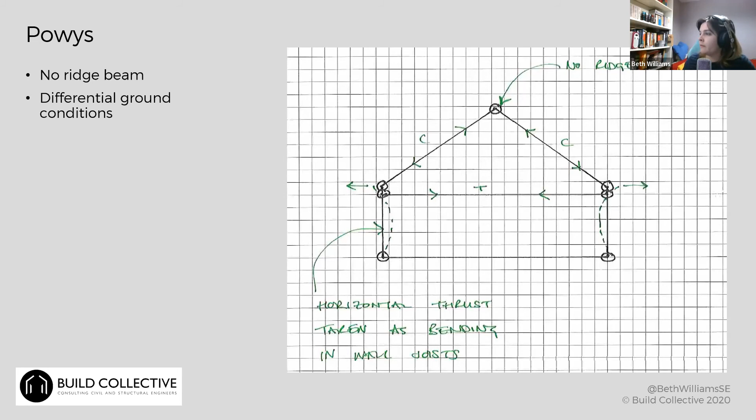And then we're forming a big frame truss there at the top, using the bending capacity of the I-joist to do that little offset of the tie not being quite at eaves level, to then tie the roof structure. And it looks very nice. So they've got a little bit of floor there, and then they had a little bit of a double height space, which I used a slightly different approach to the roof tying, but a similar idea.

This site also, veering off the topic of timber design, had differential ground conditions. On one side of this building there was a very hard limestone bedrock, about 300 mil below ground level. On the other side, that limestone bedrock dipped very sharply, and then there was a weaker stone at about 2.5 to 3 meters deep.

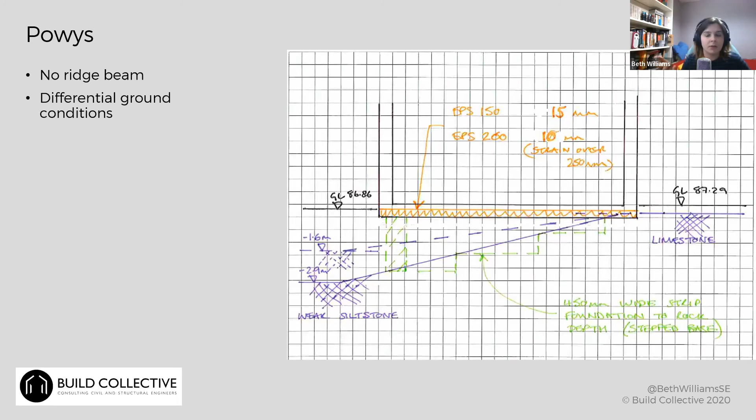So we looked at some various different foundation options here. We looked at designing the raft for the differential settlement and all sorts of different ideas. But in the end, we decided to go with a strip foundation underneath the raft. That kept the raft depth shallow and meant that we could then use a concrete that had a lower embodied carbon for the mass concrete strip foundation.

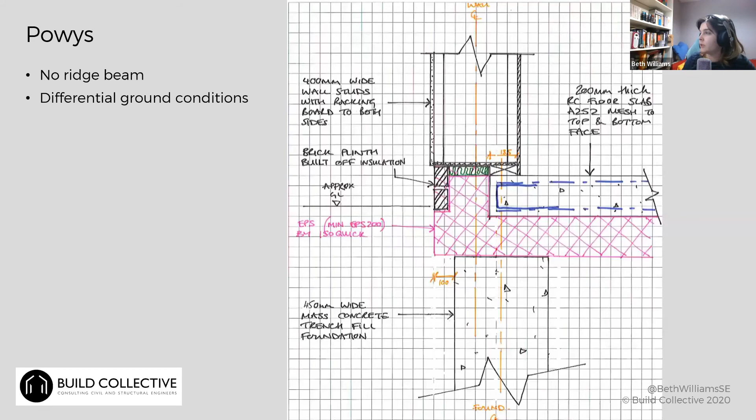Yeah, that's great. Thank you very much, Beth. And it's really interesting, isn't it?

You know, in terms of as we move to higher performance thermal envelopes, the use of I-joists, because essentially they can give you that depth of section, and then you can fill it with wood fibre, and as much as cold bridging is reduced when you're using timber as opposed to something like gauge steel etc, I'm sure that the use of an I-joist improves that benefit again, right? Because of the reduction in section.

Yeah, and like Abel was saying, and the others have been saying, that we want to be reducing just material usage generally and using it efficiently, which this helps to do. It's one way of using timber really efficiently.